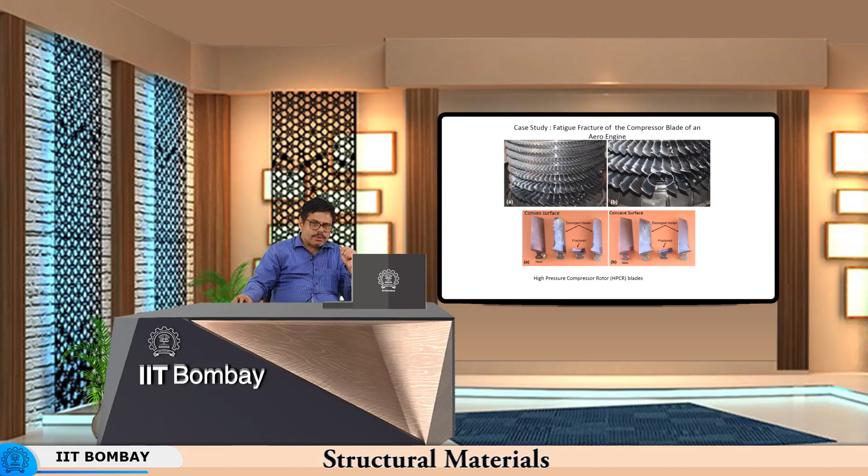However, if you look at this particular failure, compared to the new high pressure compressor rotor blades, you see that the blade has been eaten away at the edges. These two blades have been damaged because of being eaten away at the edges. So basically what it means is the blades have not been resistant to the incoming air and the dust particles which come with it.

These dust particles would eat away the blades purely because of the impact and abrasion they cause, since the air is moving at high speed as it gets into the engine. This compressor blade would therefore be subjected to bombardment of these dust particles, and wherever it is weakest, meaning wherever it is thinnest, the cross section would be thinner towards the outer periphery, and that is where it has been eaten away preferentially.

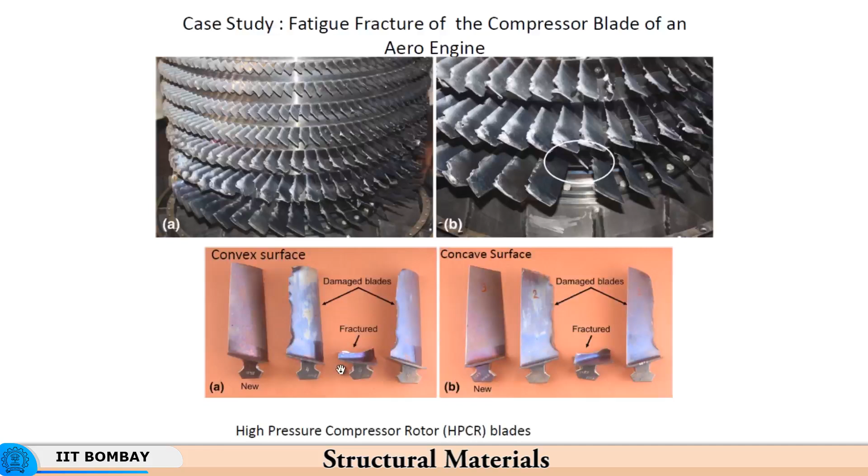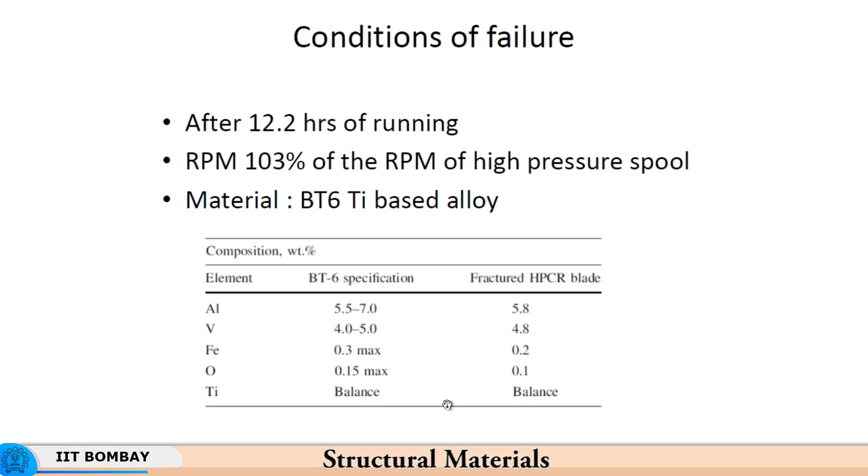However, there is a point at which the blade has fractured as well. So that brings us to the question of whether the material composition was faulty. But no, the material composition is not faulty, because all chemical composition parameters lie well within acceptable limits. The fractured high pressure compressor rotor blade had chemical composition well within range, so there is no reason to believe the material was deficient.

But if you look at the profile of the blade and the stress distribution, and look at the stress lines, this is where the crack originated, and apparently there is no reason why the crack should originate. This means that in the absence of any mechanical stress raisers, which we have talked about so much in case of ductile fracture, brittle fracture, fast fracture, fatigue, here you do not see any of these mechanical stress raisers.

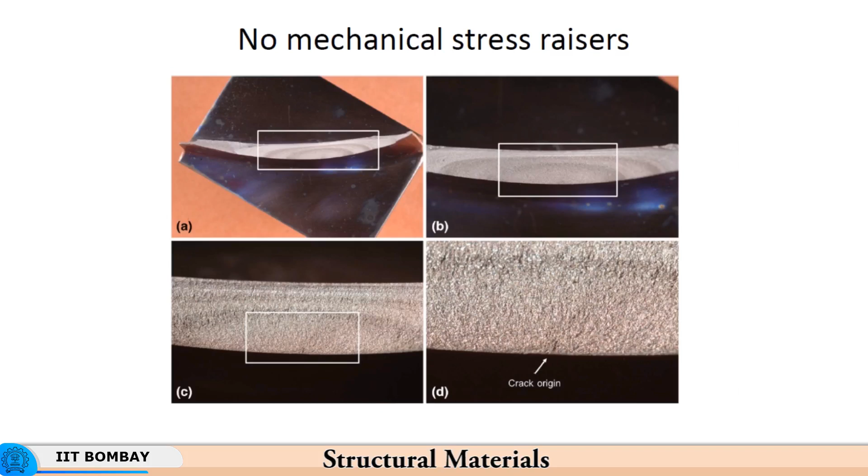So then it means the reason should be metallurgical in nature, meaning there are certain soft spots being left behind. The material has not been made hard enough, it is not equally hard everywhere, due to which at the edges it got eaten away faster. Then there is a soft spot here, due to which the crack originated, and finally failure took place.

When you look at the fractography of the different fracture surfaces, you find there is a ductile fracture. This is the final ruptured fracture, and here you have fatigue striations in the progressive crack propagation zone. But by and large this also shows some good evidence of ductility, because this also shows some dimpled fracture.

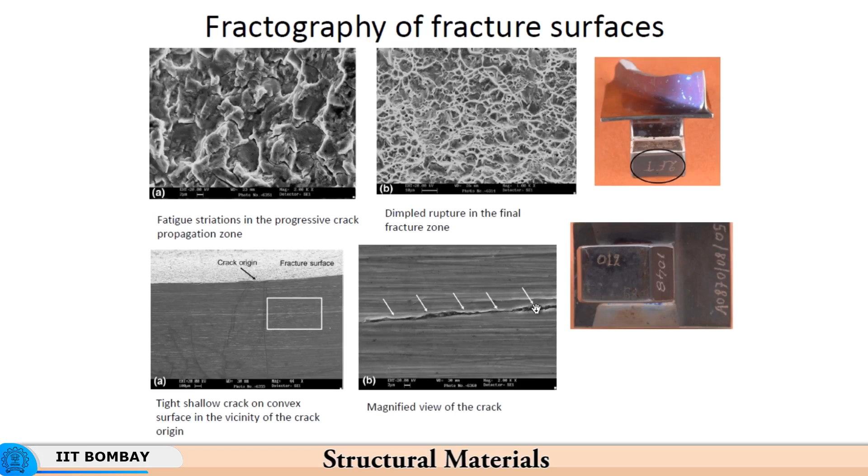So basically it was a tightly closed crack, not something that had opened up significantly, and the radius of curvature at the two ends was very sharp. If you look further, deeper into the structure, this is a very shallow crack which is visible at very high levels of magnification. That is what brings us to the initial defect present in the material.

So it was not an external geometric defect, it was a defect born internally, and this internal defect then propagated and led to the failure. This crack propagated during fatigue. As you know, during fatigue transient softening takes place because of the reversal in stress directions, loading and unloading type of fatigue, and therefore you have this kind of crack propagating incrementally.

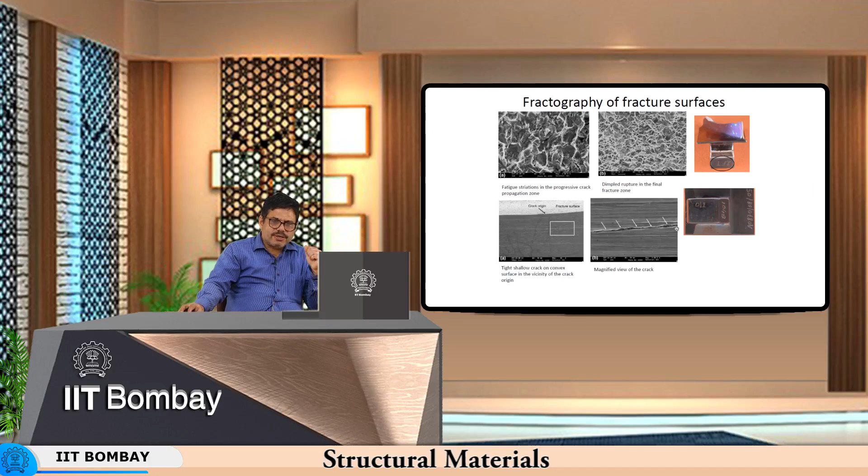The crack propagates incrementally with every cycle, and then finally there is a region of fast fracture where the final fracture zone is located. So this is where you see the dimpled fracture in the final fracture zone, but the whole story started here and it propagated incrementally with each additional fatigue cycle.

So now, if I have to say what is the kind of life that I can expect from a product which I have made. For example, the product I have made is like a turbine blade which is subjected to fatigue loading, and this fatigue loading would cause incremental damage supposing there is a flaw in it, because we know that material is never flawless. So if there is a flaw in it, it could be mechanical, it could be metallurgical.

If there is a flaw present, it will incrementally propagate. Now, I have already said that if you do not allow the flaw to propagate, then you can rest assured that there is going to be no fracture. But in case of fatigue, the state of stress or loading is not monotonic in nature, it always reverses directions, and due to which the metal gets fatigued, and the fatigue damage gets accumulated.

So fatigue damage is always cumulative in nature. Fatigue damage keeps accumulating, and over many cycles of fatigue you have accumulated damage. If you look at this fraction, which is essentially the Miner's rule, small ni is the number of cycles subjected to under one stress condition, and capital Ni is the fatigue life under that much amount of stress. So Ni is the fatigue life in number of cycles at stress Si, whereas ni is the actual number of cycles to which the body or workpiece was subjected to at stress Si.

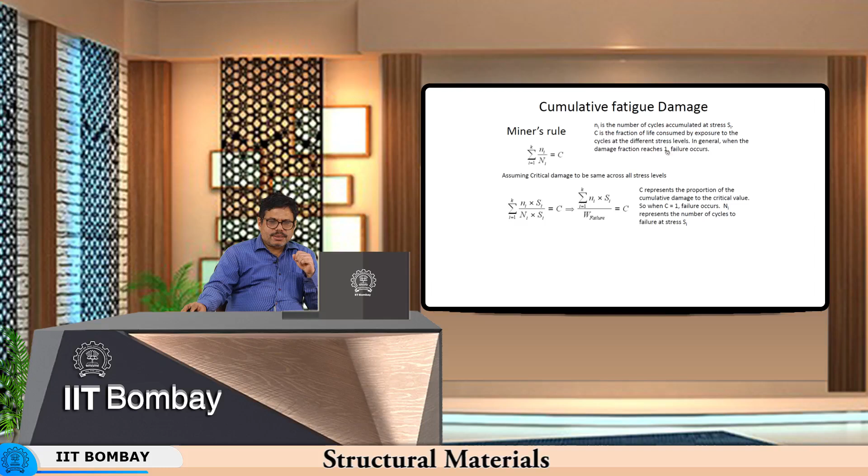That will be based on Miner's rule, and I will demonstrate in the next slide how this is done. But then sometimes people make things simpler. They assume critical damage to be the same across all stress levels. So what it means is

the material will withstand the same number of cycles, or the critical damage will be the same irrespective of the stress. In Miner's rule what is assumed is that when the stress level increases, the critical damage occurs at a lower number of cycles, whereas here that is not the case.

Critical damage is assumed to be the same at all stress levels. So what you do is you have a sum of n1 times S1 divided by N1 times S1, plus n2 times S2 divided by N2 times S2, plus small n3 times S3 divided by capital N3 times S3, and this way you add up this ratio. C represents the proportion of the cumulative damage to the critical value.

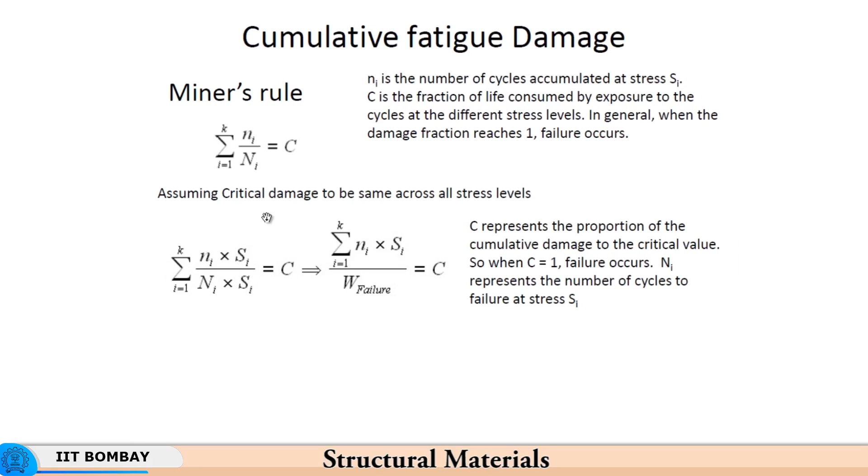So when C equals 1, failure occurs. The definition is the same as before, but now the assumption is different. Here the critical damage is assumed to be the same across all stress levels. So let us see what kind of difference it makes.

Now we have a situation where we have a rotating shaft subjected to a bending moment, and I have loaded it to a certain amount of stress for a certain number of cycles. So this is the actual number of cycles.

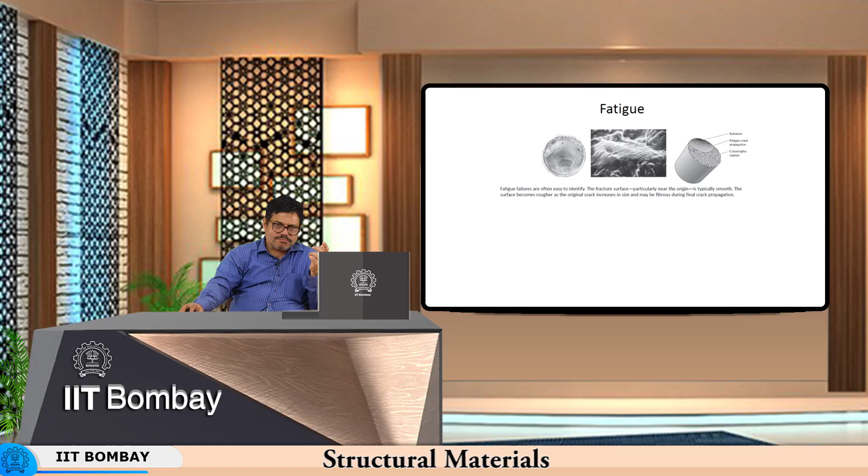And then once the cross section left is relatively small, then you have fast fracture, because now there is nothing to arrest rapid propagation of the crack. So, that is what we call fast fracture, and that is what we saw in one of the pictures we were studying earlier, for example here. So, here you have initiation, fatigue crack propagation, and region of fast fracture.

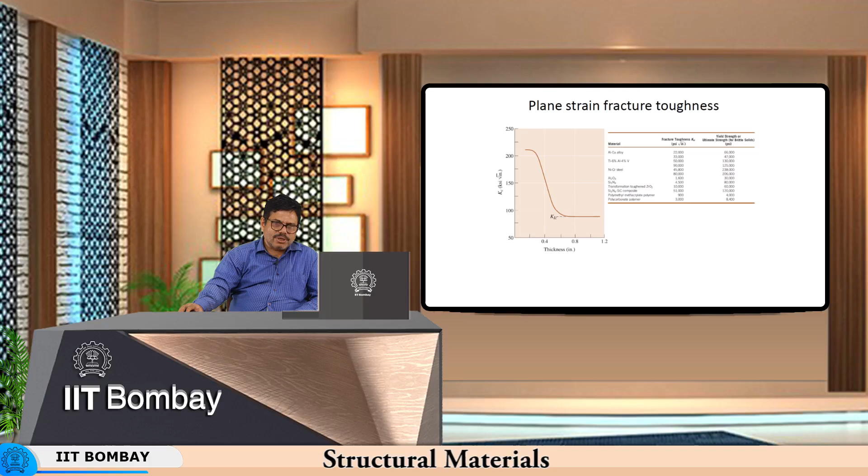So that is what we will be able to see now. The crack growth rate is given by dA by dN, where A is the length of the crack and N is the number of cycles to fatigue.

The rate of change of crack is not equal everywhere, it is not the same everywhere. You could have a surface crack, meaning a surface defect, or you can have an internal defect.

Now, when you have the stress intensity factor, this is basically the intensification of stress due to the presence of a discontinuity, given as sigma m by sigma naught. Sigma naught is the average stress based on the entire cross sectional area being assumed to take an equal amount of load, or the stress distribution being constant over the entire cross section. So that is sigma naught, and sigma m is the actual stress felt at a discontinuity.

So you have either a step or an internal flaw, or at the edge of the flaw a very sharp radius. There you will find the stress is not equal to the average stress, it is far higher. That is what we call stress intensification.

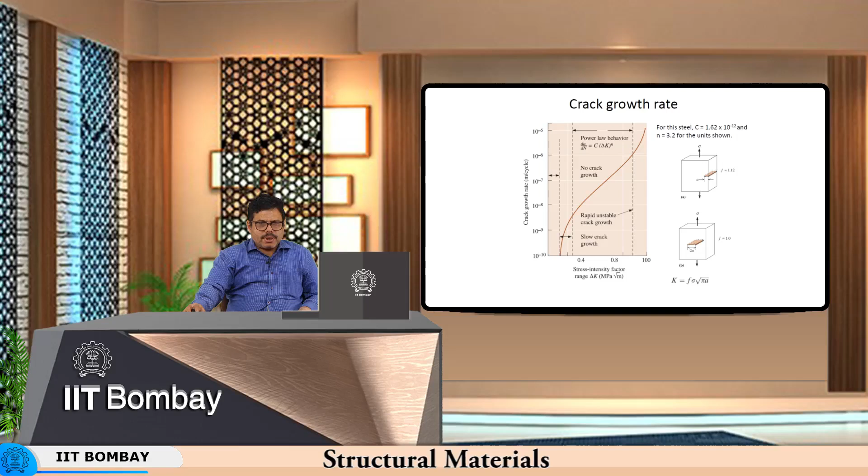As the crack grows more rapidly over here, you see there is a slow crack growth here and there is a much more rapid crack growth here. The rate at which delta k will increase, meaning delta k will shift to the right, continues to increase, and then here it becomes extremely high.

So now we take up a small problem which you can solve at home, and then we will also give out the solution to that. A high strength steel plate which has a plane strain fracture toughness of 80 MPa meter raised to 0.5 is alternately loaded in tension to 500 MPa and compression to 60 MPa. Now you see that the loading is not symmetric between tension and compression. It is more in the tension region, less in the compression region, but nevertheless it does get into the compressive regime. The plate is to survive for 10 years, so the life of the plate you expect is 10 years, and it is being subjected to this fatigue of 500 MPa in tension and 60 MPa in compression.

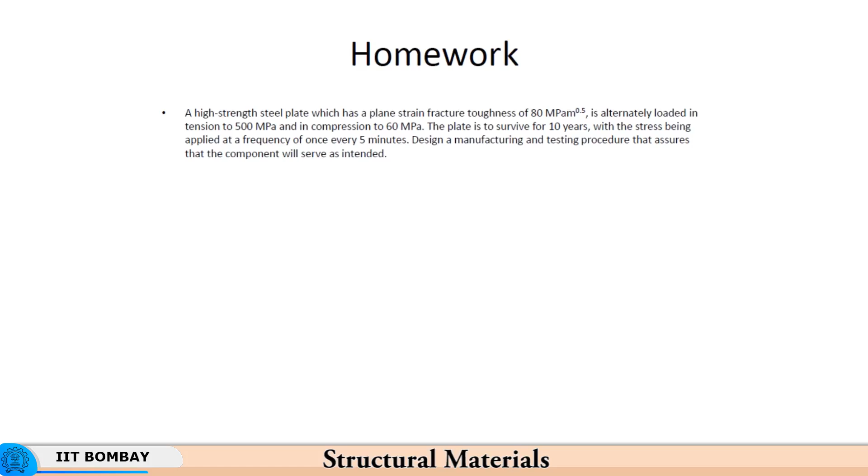So the stress is applied every 5 minutes. You have 500 MPa and then the stress of 60 MPa is applied. It goes to 60 MPa after 5 minutes, again comes back to 500 MPa in the next 5 minutes, then it again goes down. This way the stress is applied every 5 minutes, and so the question is how do we design the manufacturing and testing procedures that guarantee the component will serve as intended, meaning it will have the intended life of 10 years at the stresses it is going to be subjected to, namely 500 MPa in tension and 60 MPa in compression.

So with this we summarize that fatigue damage is always cumulative, it cannot be reversed in any case. Fatigue damage can occur despite no obvious mechanical stress raisers, because you can have metallurgical defects as well.

Although geometric defects can be eliminated by conscious design effort, metallurgical deficiencies can result in soft spots remaining behind, meaning the material being weak at different locations, which nucleates a crack. Because even in the absence of mechanical stress raisers, the stress magnitude acting on the workpiece is going to cause greater deformation in the relatively weak zone, and as a result it will have much less ductility, or will exhaust its ductility very rapidly, and therefore the damage will keep on accumulating.

So now with the accumulated fatigue damage, with the ductility getting exhausted with every fatigue cycle, there will be a crack nucleated and finally it will propagate. There will be a decrease in the stiffness of the product, because as the crack propagates inwards, the damage is being done progressively, resulting in continuous decrease in the stiffness of the product.

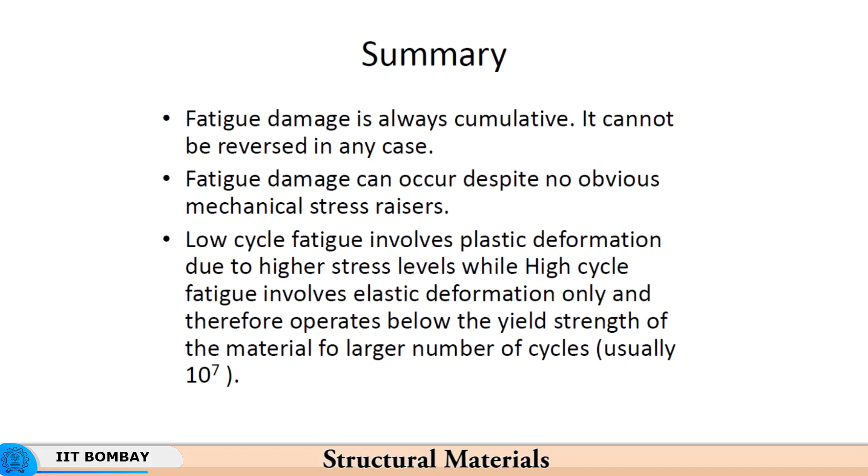Low cycle fatigue involves plastic deformation due to higher stress levels, while high cycle fatigue involves elastic deformation only. So I had shown you this curve, we observed that here for example you have very high stress, and correspondingly you have much lower number of cycles to failure. Here the deformation is plastic in nature, there is permanent deformation, you have crossed the yield point, and as you go down, at some point you go below the yield point.

So the endurance limit would be below the yield point. Low cycle fatigue, meaning fatigue at which the life is relatively small, the number of cycles the component survives is very small, so in that case this is called low cycle fatigue. The plastic deformation is part and parcel of low cycle fatigue. The low life, that is smaller duration of life, is also a result of the high stress and plastic deformation taking place.

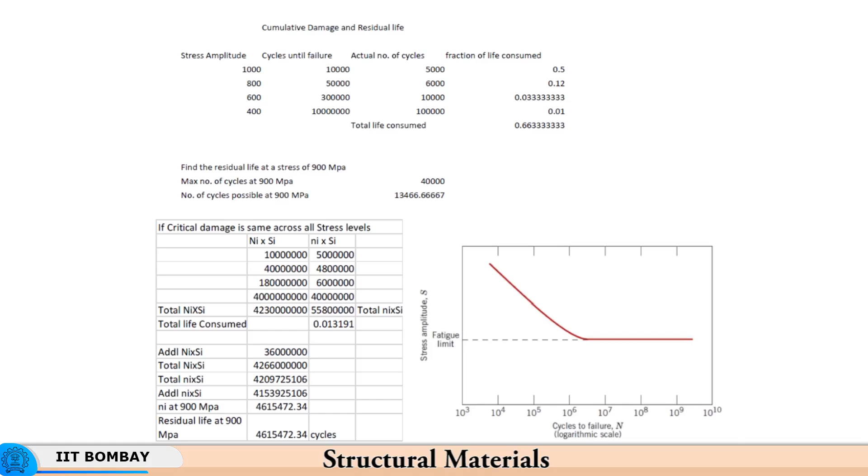The ductility getting exhausted and then the crack getting nucleated and the crack propagating throughout the entire mass of material. Whereas here you are in the elastic regime, so there is no permanent deformation. What is happening here is that there is only a change in the sign, only a change in the direction of deformation, in case you have both tensile as well as compressive stresses.

And so we have a fatigue limit which is much lower than the yield point of the material. But then it will not only withstand the stress forever under monotonic loading, it will also withstand the stress forever, meaning more than 10 to the power 7 cycles, in fatigue loading as well.

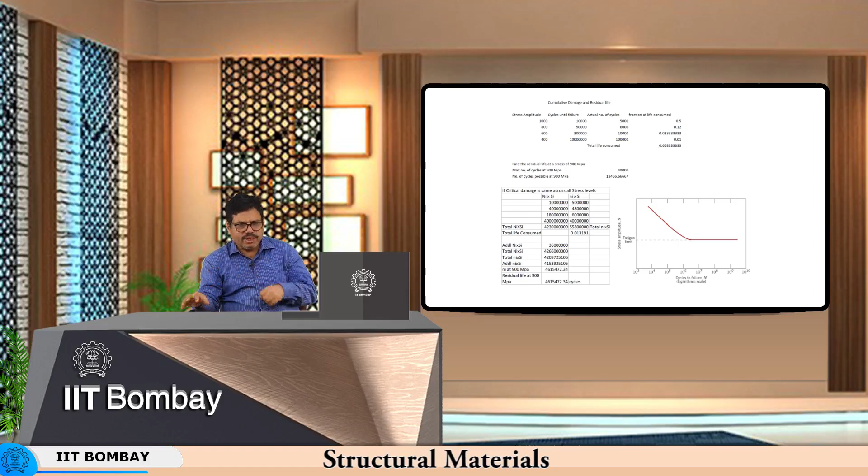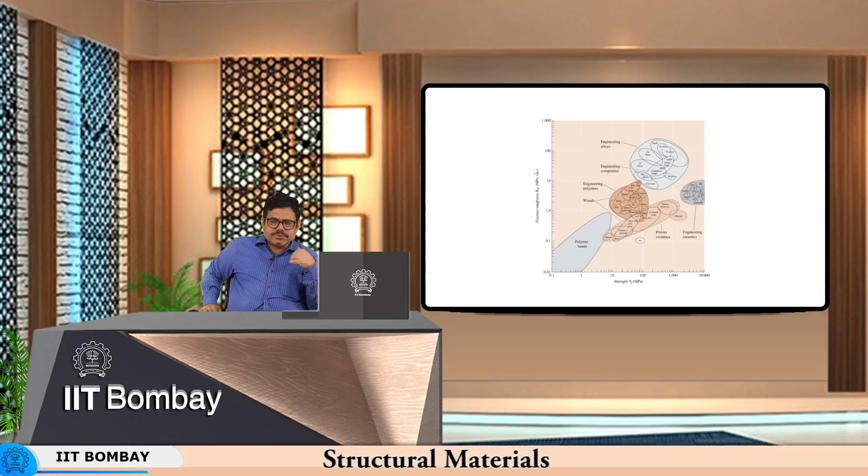So with this we come to the conclusion of this lecture. Here what we see is that the different amount of fracture toughness that the material has also plays a role in fatigue, because for the fatigue crack not to propagate, the toughness of the material should be sufficiently high.

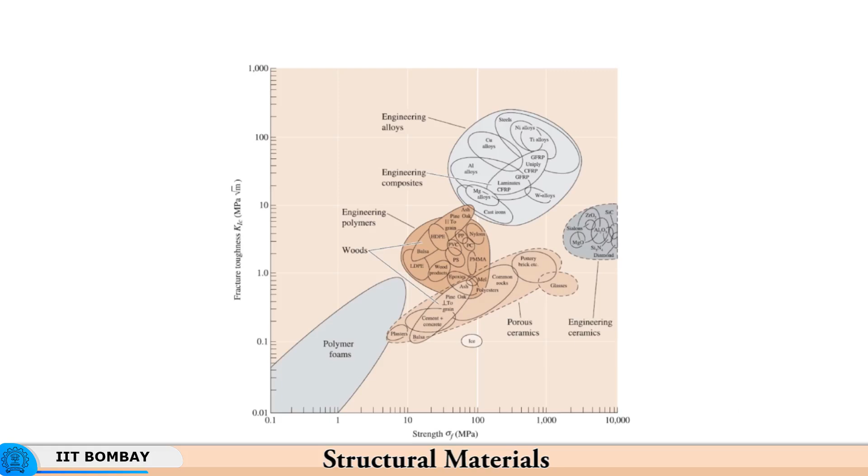And so you have engineering alloys where the fracture toughness is relatively high, and then medium with engineering polymers, porous ceramics having a very poor level of fracture toughness, and polymer foams, of course, because of inherently present defects in the form of holes, because a polymer foam is essentially a fluffy entity, which means it already has plenty of blowholes or something like that, which can be considered as defects in case of fatigue. So with this we come to the conclusion of the topic on fatigue and fracture.

You have got an exposure to fatigue and fracture, but now we will come to another discussion on what is called heat treatment, because we saw during the lecture that in spite of not having stress raisers, we had a spot that had remained soft in the material.

Normally what happens is you add alloying elements, you make different kinds of additions to the material to generate certain properties that you want. With these materials generating different phases in the material, you get the desired strength, the strength distribution is as per your desire, and therefore you do not have any fatigue failure or stress concentration or stress raisers being generated.

But at many spots or points, for example, you might have held the workpiece using a tong or something else, and though the tong did not leave any mechanical impression on it, what the tong did was change the history of heating and alter the heating rate, alter the cooling rate, and thereby change the microstructure.

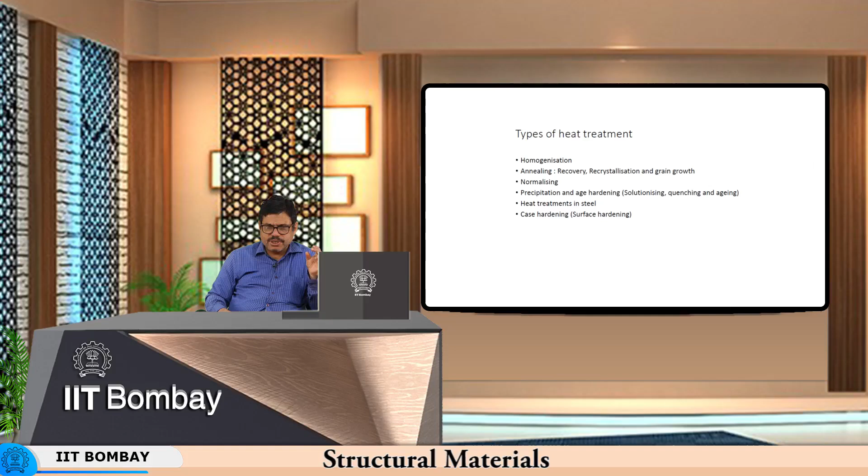Now the gear tooth of one gear contacts the tooth of another gear on its surface. So the load transmission takes place at the surface, one gear tooth slides relative to the other gear tooth, there is friction, there is a tendency to wear, because when there is friction and when the contact pressures are relatively high while transmitting torque, you have a tendency to wear out, a tendency to get deformed, because under the load the gear geometry can change temporarily. So there are basically lots of issues that can arise due to high load being felt at the point of contact between two gear teeth.

So now what we need to do is make the surface hard, because supposing there is a crack at the surface or the root, or there is some stress concentration taking place, or for some reason there is a crack, then it should not propagate rapidly. Because if I harden the material throughout, I am losing in terms of fracture toughness, because once the strength increases, the ductility decreases. Now when I make the entire bulk of the material strong, I am paying in terms of reduced fracture toughness, reduced ductility.

So, what it means is that if the crack were to originate, the plastic zone formed at the tip of the crack is going to be extremely small. It is going to be capable of absorbing a very small amount of energy. Naturally, the capability of arresting the crack will be very poor if the entire hardness of the workpiece is increased.

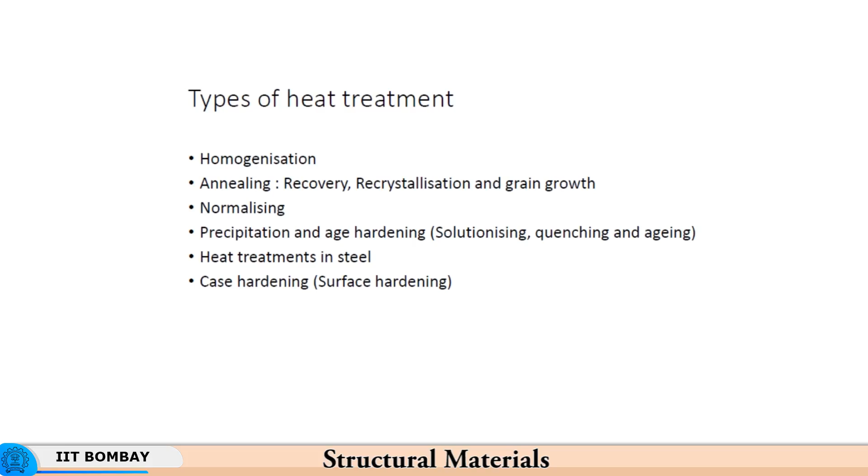Heat treatments can never be delinked from the phase diagram. If you look at the different temperatures in the iron carbon diagram, you have the melting point at around 1540 degrees centigrade, and then as the material cools down, depending on the percentage of carbon, you get different kinds of microstructures. For example, in this case, if it cools from this particular point, let us say this is the chemical composition of a certain percentage of carbon.

As it cools down, you have liquid plus austenite getting formed. This gamma refers to austenite. So slowly it cools, this is the liquidus line, this is the solidus line, and then it has cooled below the solidus. So it becomes entirely gamma, and this is the austenite phase. It is a single phase.

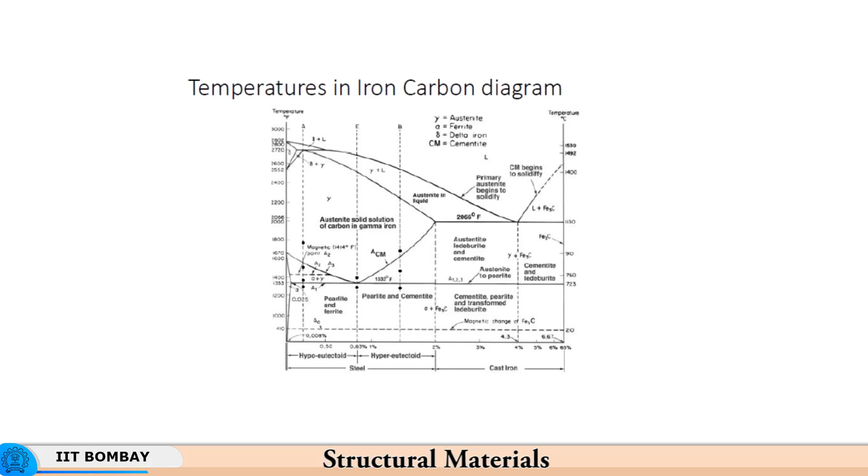Normally what people do is, if they want to deform the material and generate a large dislocation density, they heat it to the gamma phase, that is a single phase, and then deform the material. So you do not have to go to very high temperatures, you can go right up to here, for example, so the temperature can be relatively smaller at 800 degrees centigrade or so. You can heat the material to the austenitizing range, meaning austenite temperature, get a single phase and deform the material.

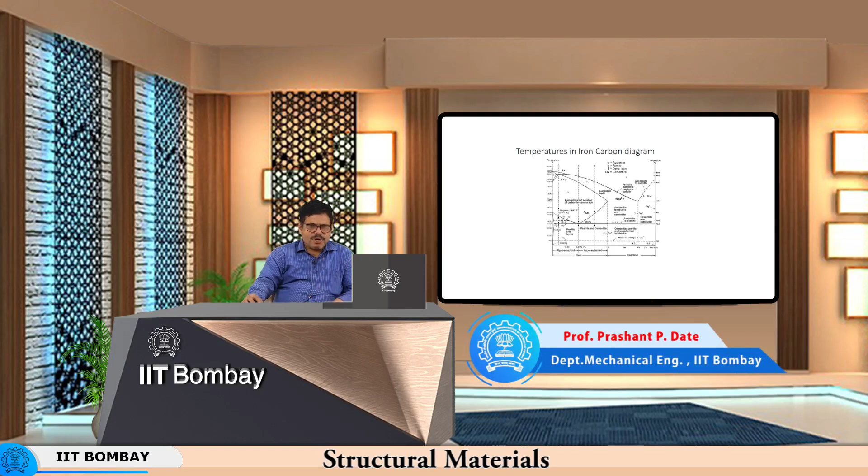Here it is not very strong, since you want to deform the material, you do not need it to be very strong either, but in service you need it to be strong. So naturally what you do is cool it from austenite very rapidly to what you call martensite. Now, this is based on a very slow cooling rate, but formation of martensite happens at a much faster cooling rate. So you will not see any martensite here, but if you were to adopt very slow cooling rates, you will get different kinds of microstructures depending on how the material has been cooled, at what cooling rate it has been brought to room temperature.

So, we will see more on heat treatments in the next lecture.